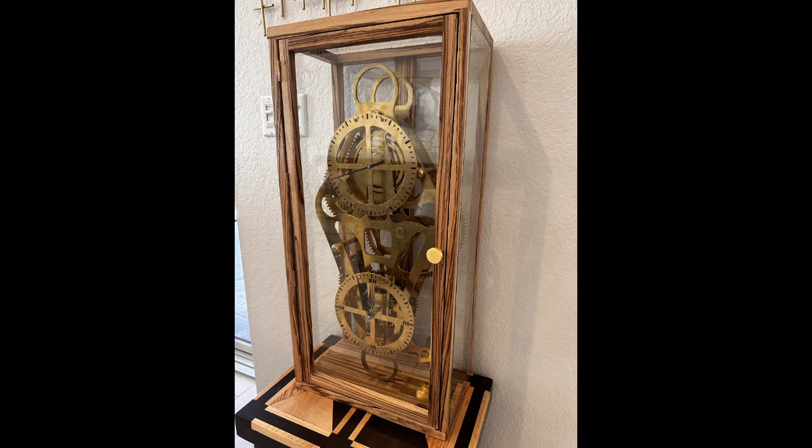I'd like to share with you my experience of making a clock for the very first time. This clock has 13 brass gears, weighs 50 pounds, and took 5 months to design and build. And it all started with an idea at 5 o'clock in the morning, which is my normal wake-up time now since retirement.

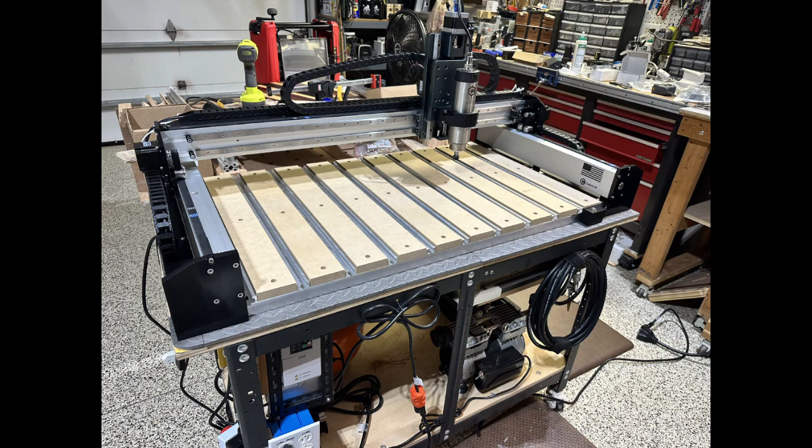For Christmas of 2024, after weeks of research and far too many YouTube videos, I bought my first CNC machine, a Carbide 3D Shapeoko 5 Pro, including the 65mm VFD spindle kit. I'd spent years building woodworking projects, plaques, cutting boards, charcuterie boards, coasters, everything carefully drawn first in CAD before a single cut was made. But until recently, everything was still done by hand with whatever power tools I had that would accomplish the task.

One early morning, I decided I needed something more difficult, something that would take real patience, and something that would make me learn entirely new skills and work with materials I was not used to working with. So, I chose to build a clock.

I dove into clock design, gear ratios, and more math than I'd done in months. After weeks of calculation in Excel, drawings, and revisions in Fusion 360, I developed a deep respect for the clockmakers of the 13th century. They did this without computers, and their clocks still run today.

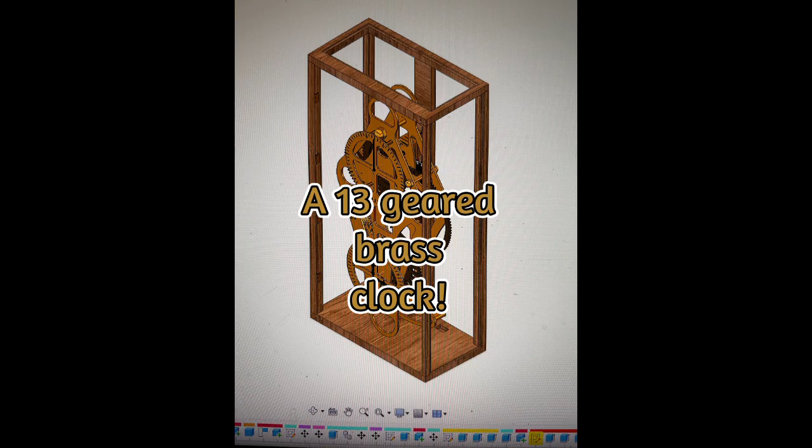But eventually, I had a game plan. A 13-gear brass clock inside a zebra wood glass case. 13 gears might sound unusual, but as you'll see, that number came from a mistake that turned into a solution.

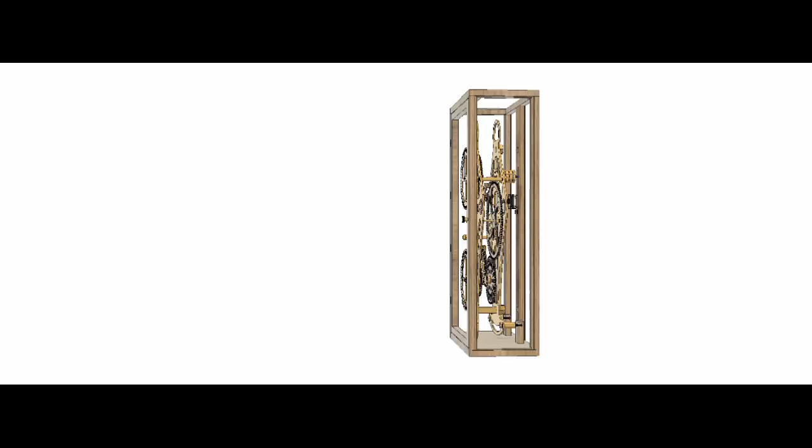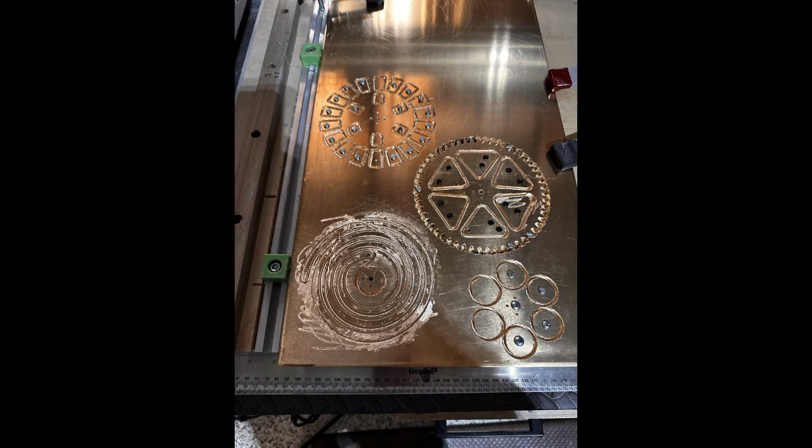I had never worked seriously with metals before, but I chose brass for the gears and plates. In hindsight, using thinner brass would have made it much cheaper and lighter. Lesson number one.

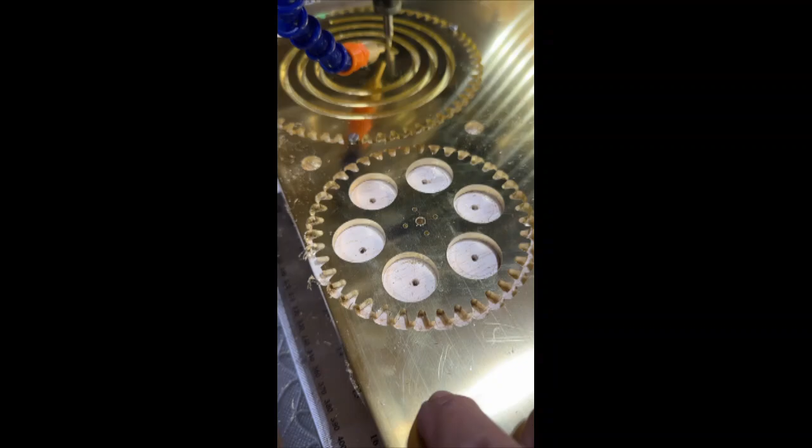The first time I cut brass on the CNC, I broke several bits and invented a few new words. But after dialing in the feeds and speeds, the gears started coming out beautifully. Each one had its own design to make the final clock look unique.

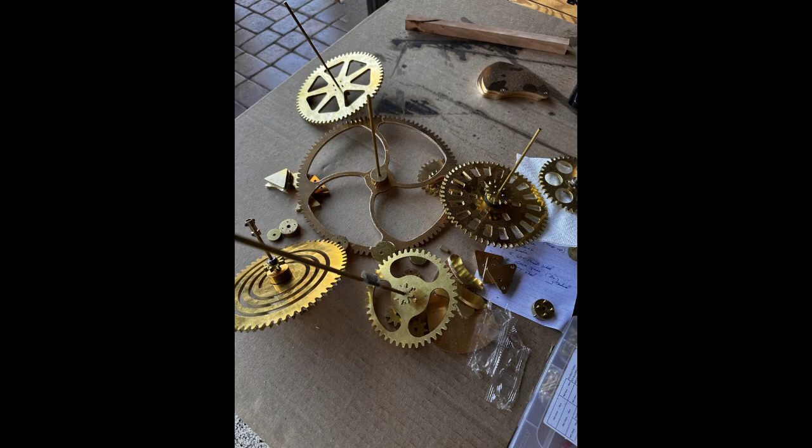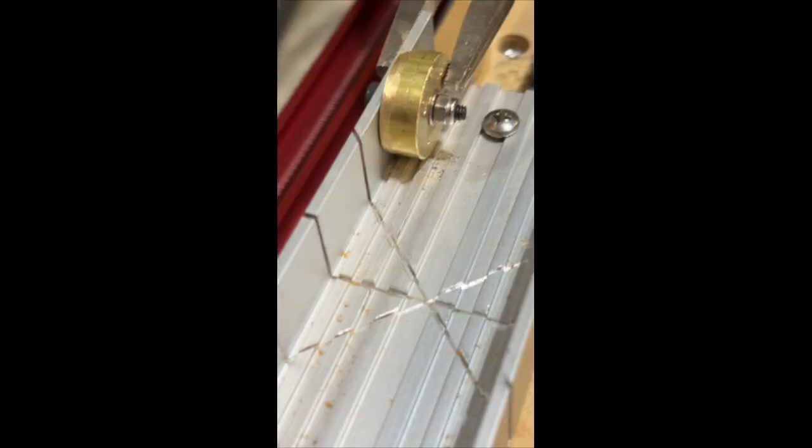The most delicate part was drilling and threading tiny 2mm holes to hold the hubs to the gears and the gears to the shafts. I made custom jigs, held my breath more than once, and slowly it began to take shape.

Using 4mm brass shafts that would fit into miniature flanged ball bearings, the shaft assemblies would be inserted into place and held in recessed mounted holes in the front and back plates that were cut during the CNC plate cutout.

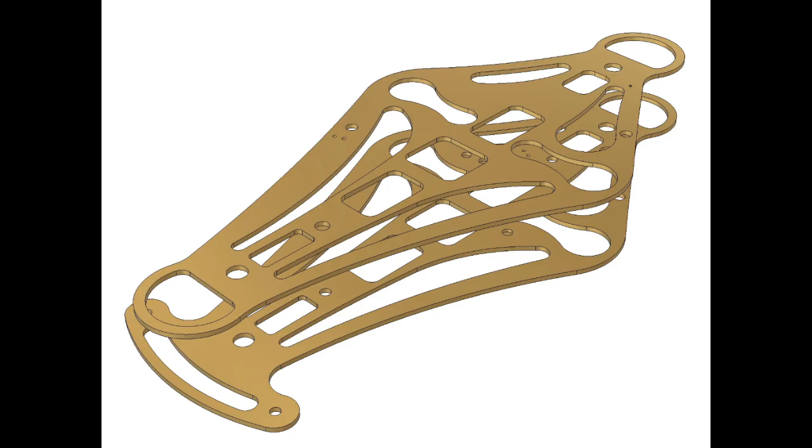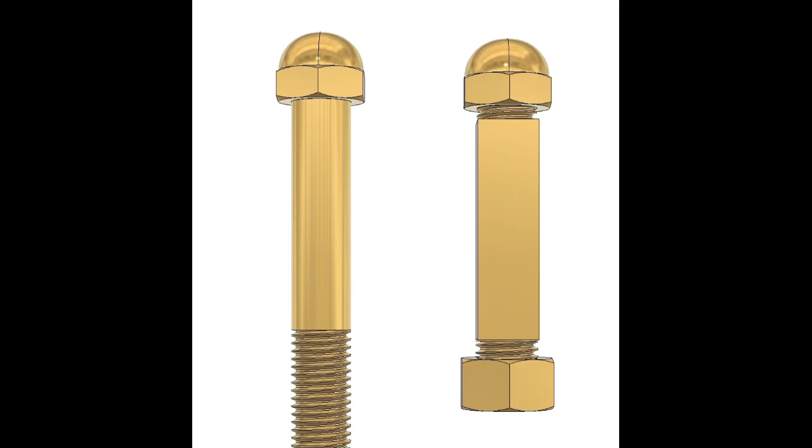To connect these plates, I made two half-inch connecting brass rods threaded on both ends. Next came the main connecting rods, a three-quarter-inch round rod and a three-quarter-inch square rod, chosen for effect and threaded on both ends. Brass cap nuts held all of the connectors in place.

I began to assemble the hubs to the gear wheels and then the two cock assemblies that would be fastened to the front and back plates.

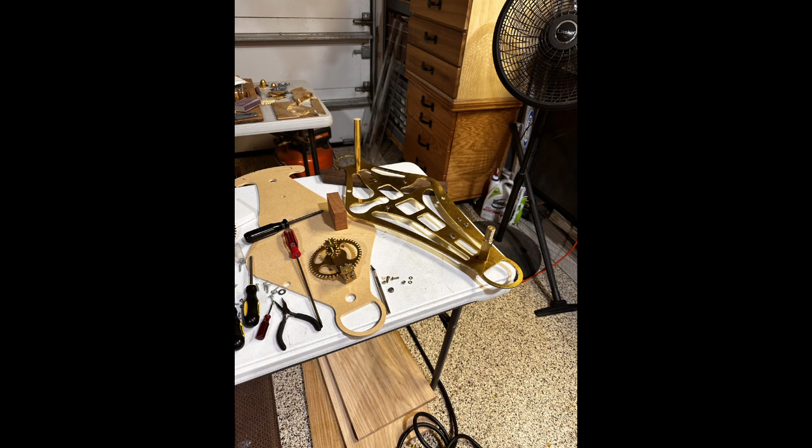Saving the front and back plates to last, before I made a mistake and lost the exact amount of brass I had left, I made the plates on the CNC out of quarter-inch MDF and then used those to make sure all the holes lined up properly.

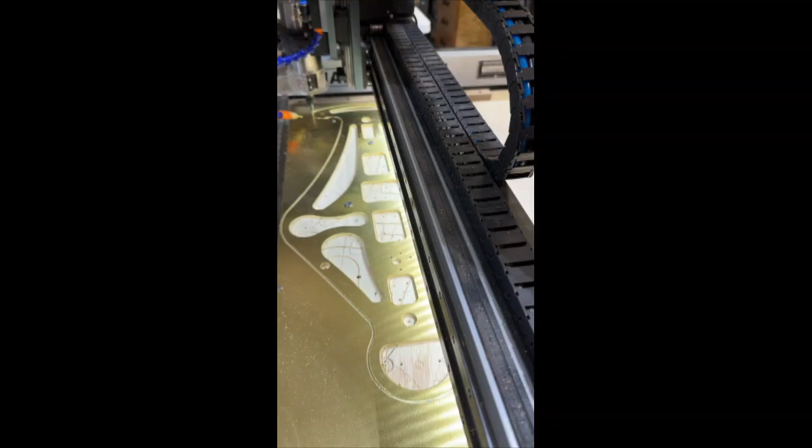This was where all that design and measuring effort in Fusion 360 really paid off, as those holes and cuts in each plate had to be very precise to allow for good shaft movement and motion.

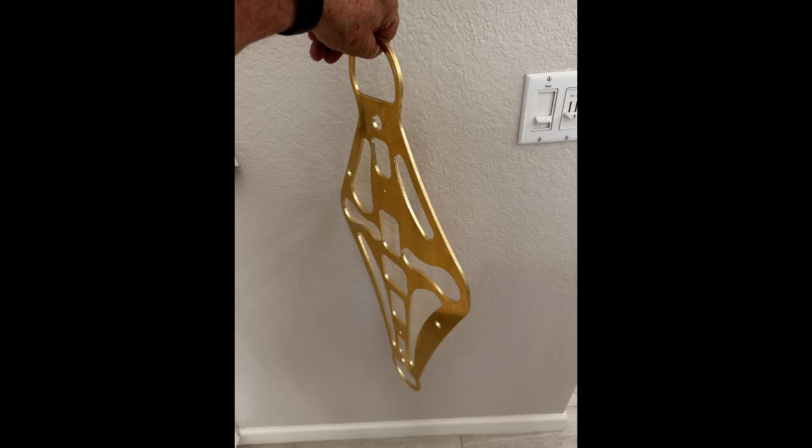Being fairly confident that the Carbide Create Pro design was spot on, I began the cutting. And man, I got lucky - just enough 3/16 brass left to make both plates.

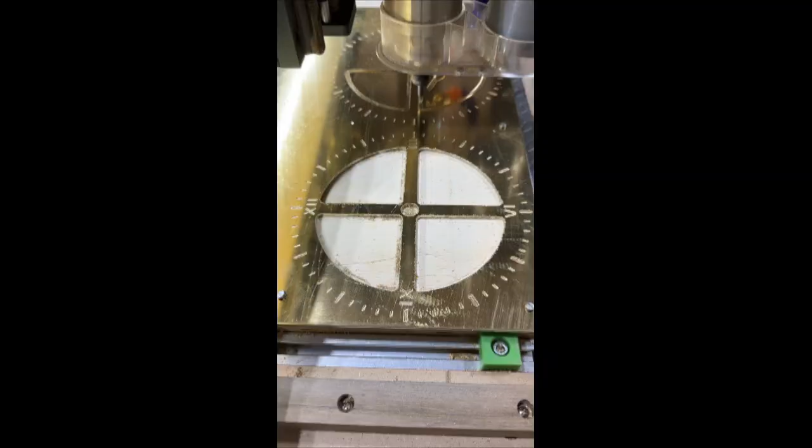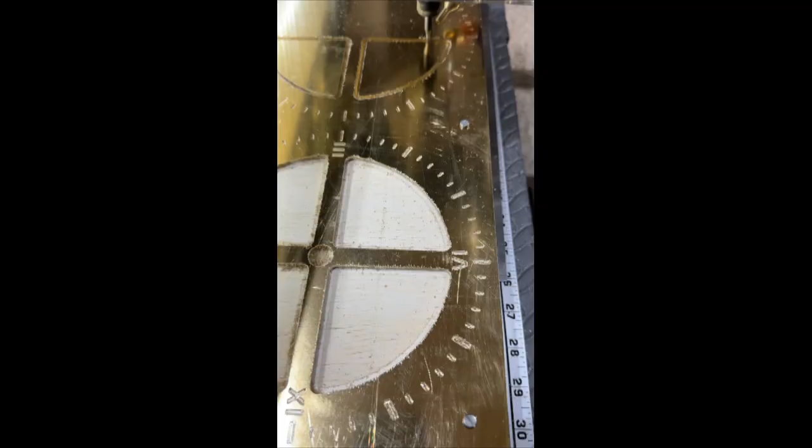The clock has a second hand dial on the top and a minute-hour hand dial on the bottom. These dials were cut out of 1/8 inch brass and engraved to a total depth of 65 thousandths. After all edges were smooth and the dials thoroughly cleaned, I painted the markings with a black matte acrylic paint and applied it with a plastic syringe.

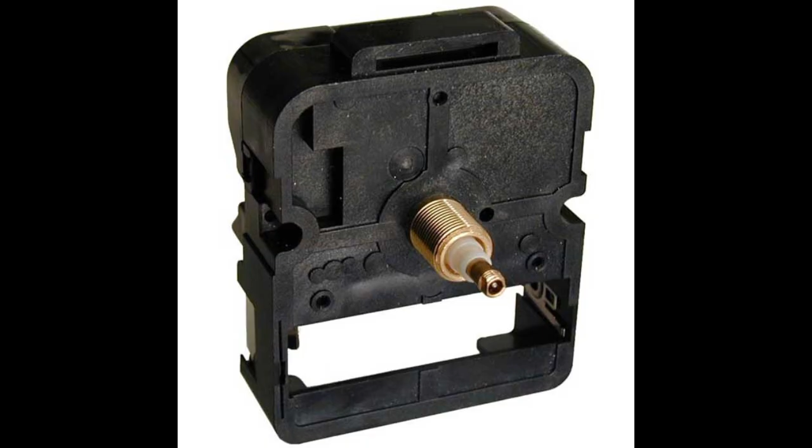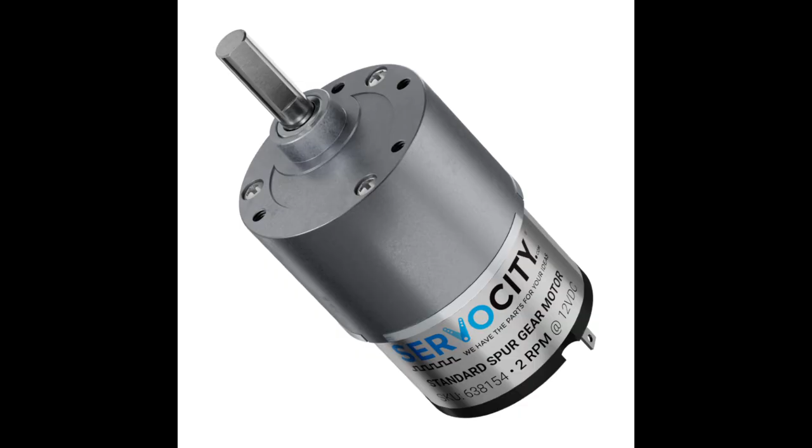The clock hands were ordered online from a clock parts vendor. I had originally planned on running this clock with a battery-operated quartz clock movement purchased online, but it became obvious that it would not have enough torque to move the second-hand gear wheel and all the sequential gears. The solution? A standard 12-volt brushed DC 2 RPM motor and a 6 to 14-volt motor controller for precise speed adjustment.

This would be powered by a 12-volt 25-amp power supply. Not wanting to see the motor housing and its labels, I designed and 3D printed a motor cover to look similar to the clock itself.

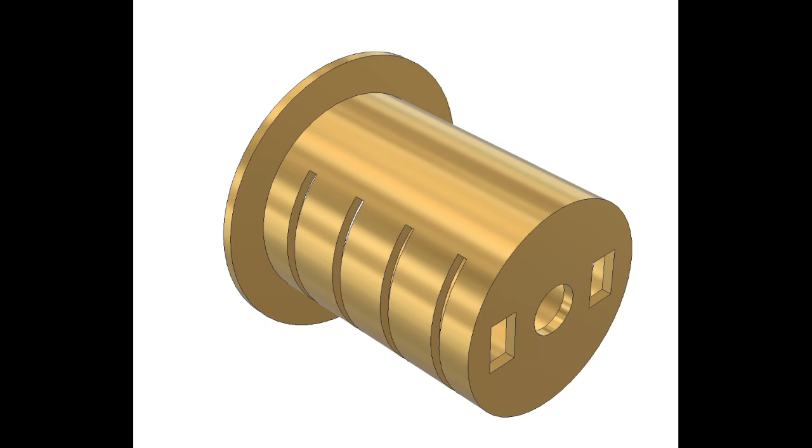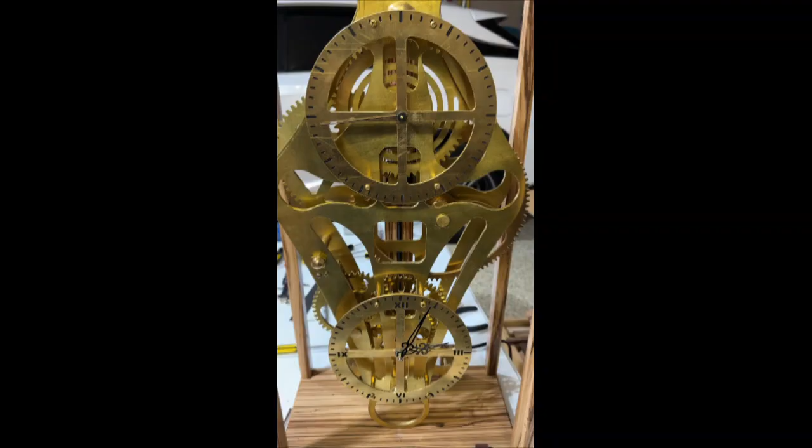And then came assembly day. The shafts, the bearings, the rods, piece by piece, it all came together. I held my breath and flipped the switch for the first test. And wow, it worked. Well, sort of - the hour hand was moving backwards.

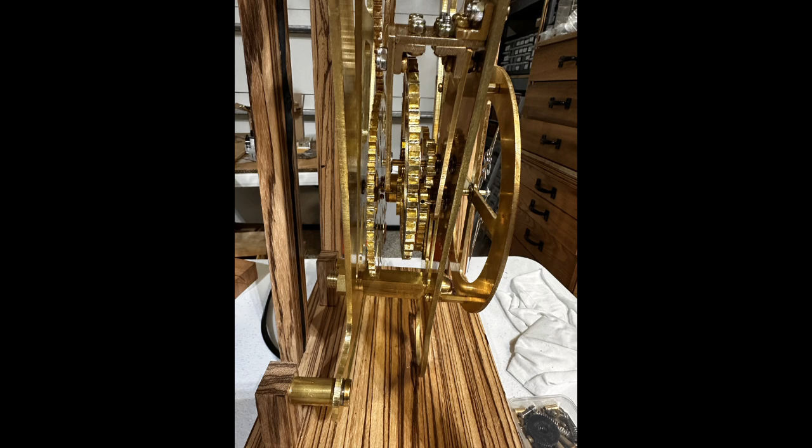As it turns out, adding one extra 10-tooth gear for gear spacing had reversed the direction of the hour hand. The fix meant redesigning cock plates and adding another 10-tooth gear. That's how this became a 13-gear clock. So back to the workshop.

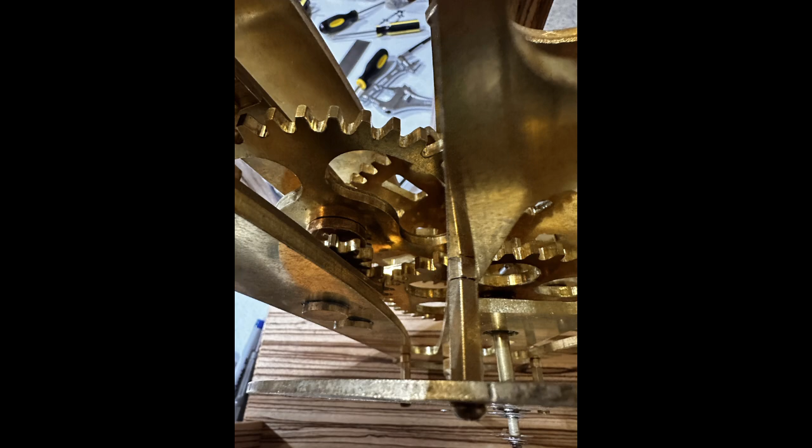Next problem, the gears kept locking up in the minute-hour gear train. After hours of watching the motion, I did not discover any conflicts with the gears and the mounting plates. But continuing to analyze the motion, I realized the gear teeth edges were so sharp they would bind.

So I disassembled everything in the minute-hour gear train and carefully filed every tooth. Thousands of tiny strokes later, the gears now turned smoothly. I adjusted the motor speed, and finally, the clock kept perfect time.

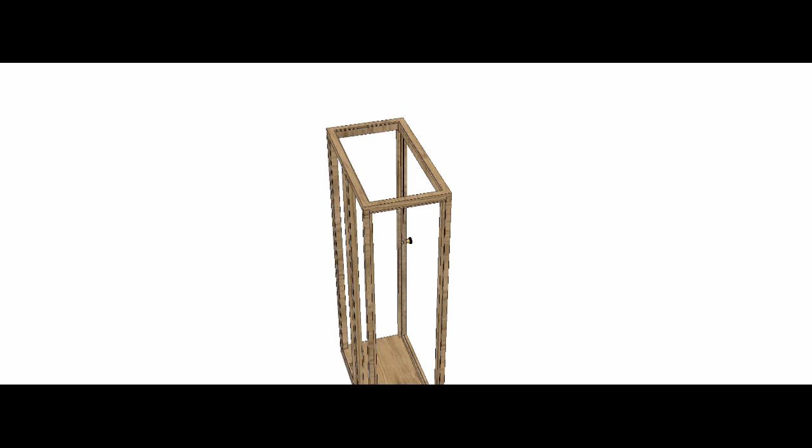I needed to make a nice-looking case so that my better half would allow the clock into our home. So I designed a case made from zebra wood, one of my favorite woods, and tempered glass. Inside it, all those brass gears now moved quietly together, just like I'd imagined months earlier.

Before completing, I engraved a plaque. I thought about adding my age, 80 years young, but my wife suggested that might not be necessary. She was probably right.

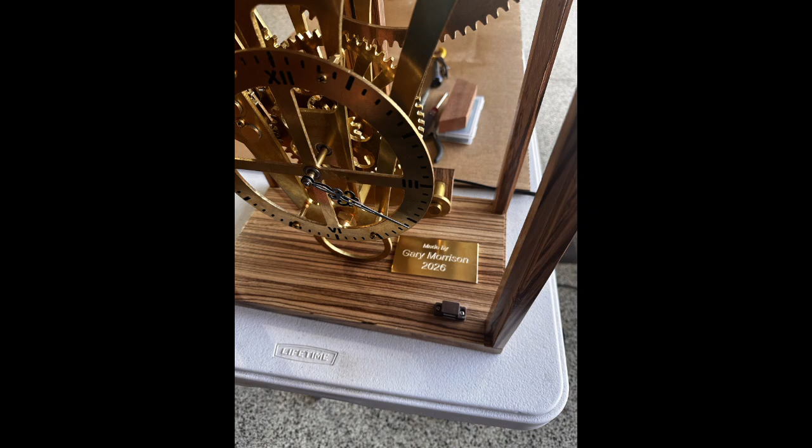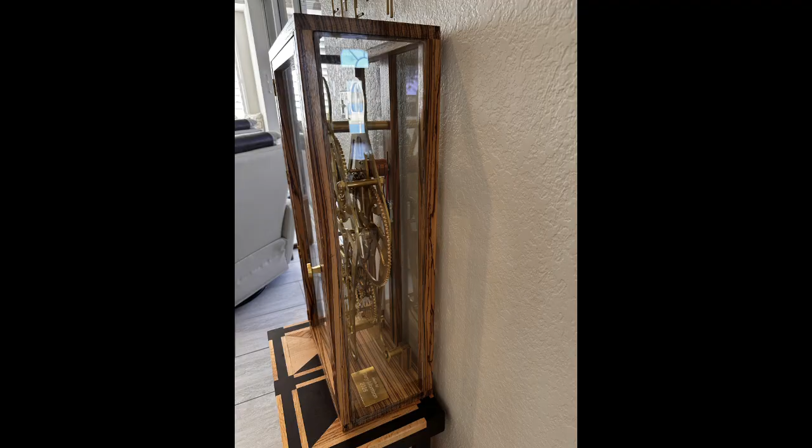13 gears, hundreds of design hours, several broken bits, and more lessons than I can count. But a few things I've learned: I'd use thinner brass next time, an encoded motor would make better speed control, and good technical support is worth its weight in gold. A big shout out to the technical support folks at Carbide 3D, Servo City, and Online Metals.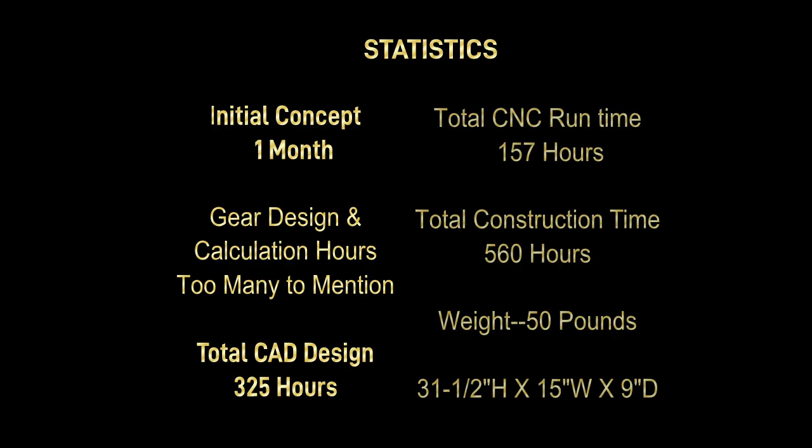They were very professional and helpful to a very naive clockmaker. But I guess the biggest lesson learned? You're never too old to learn something difficult. You're never too old to start a new project. And sometimes a 5 a.m. idea can turn into something that just might outlive you.